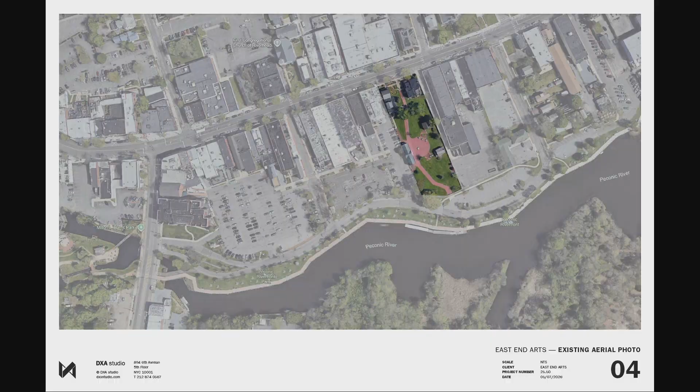The first slide is simply showing the existing conditions and the current campus of East End Arts in the context of the town of Riverhead.

Most of these buildings have been relocated at one time or another. The Corwin House and the Benjamin House are original structures that are important from a preservation point of view to maintain frontage along Main Street, and that's going to be incorporated into the plan that we show you.

This next page is simply a site plan showing the existing condition as it is. What's important to note here are the elevations, the heights of the topography. At the rear of the site, the south end, we're down around 5.0 in elevation. Up at Main Street, we go between 13 and 12.6 on the edges of the site. The goal is to get the site up to 13 or 13.5 in order to reach the proper elevation to avoid any flood issue.

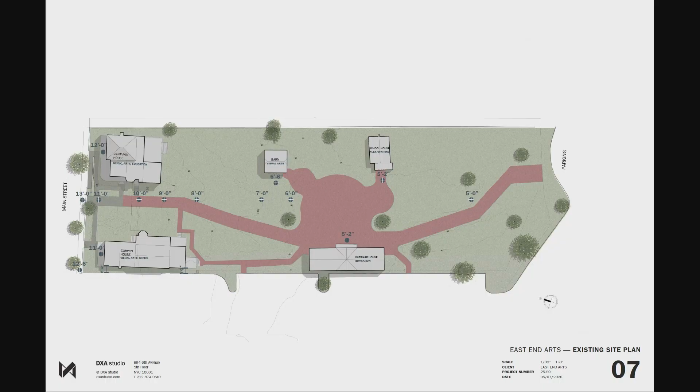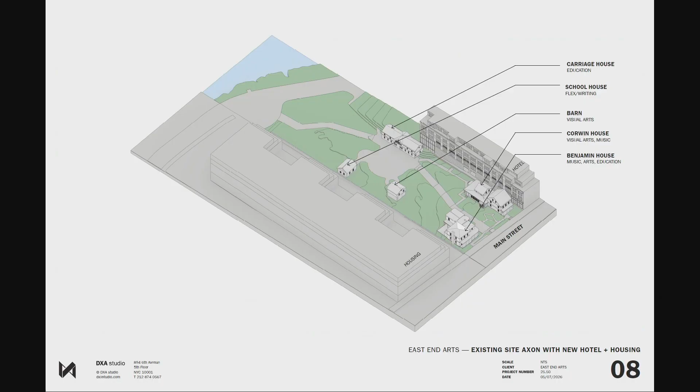This next page, on page 8, is showing the existing campus in the context of the new buildings that are under construction or underway, in terms of the hotel to the west and also the new housing project to the east. We wanted to show this in reference to the scale of the campus versus those projects and thinking about how the interaction of those buildings works with our project.

This is a perspective view from Main Street showing what it will be like when those buildings are completed, without doing any moving yet. In terms of planning, we wanted to really think about how we mitigate between those existing structures and the new structures and create a buffer and also an identity for East End Arts.

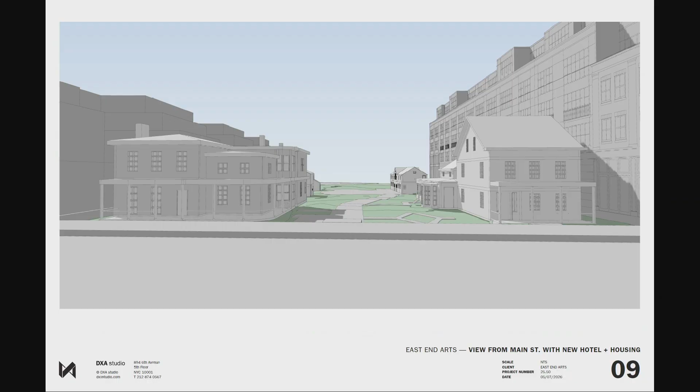The next page is now getting into the strategy of how we want to deal with the elevation changes on the site. Our thought was that instead of bringing up the majority of the site, or the whole site, to that goal of 13.5 in elevation, we would try to locate the raising of the topography up on the northern end of the site towards Main Street.

And that gives us an opportunity for two things. One is to create a campus for East End Arts on the northern side of the site. Then on the southern end of the site, it leaves it open as an opportunity for an outdoor theater project, which has been proposed previously, and gives a lot of flexibility in terms of how that could be realized. By doing this, the goal really is to mitigate the amount of soil that we need to bring onto site to achieve that topography.

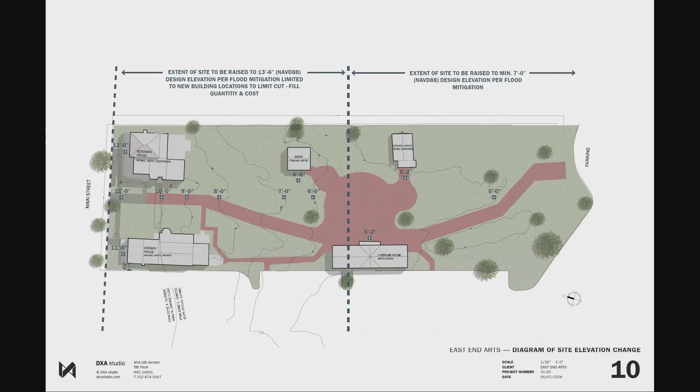In the next image, we're going to go through a series of slides that shows how the buildings will be moved. On the bottom left, what we're showing in shadow here is the Corwin House moving up. That's in part to accommodate an access road that is next to the hotel.

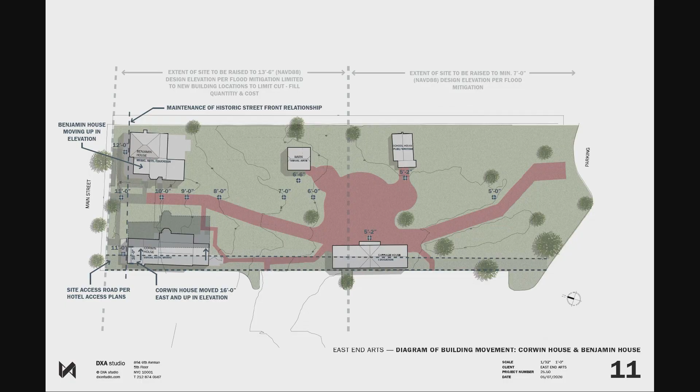But we also need to maintain the street frontage of the Corwin House along Main Street for historic preservation purposes. The Benjamin House will stay in pretty much its exact position and plan, but it'll simply move up to the 13.5 level.

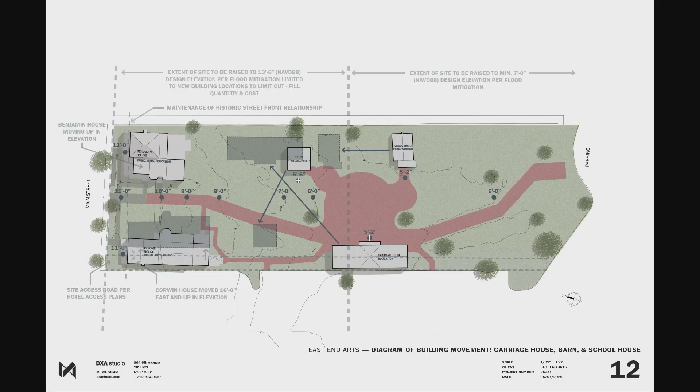What we're showing here is the carriage house, which has a specific programmatic relationship to the Benjamin House, will move up and over and kind of flip around. We're also moving the schoolhouse up in front of the dotted line, and then the barn, which we envision as being part of the visual arts programming at East End Arts, would be closer to the Corwin House so we can create that relationship. The carriage house and the barn sort of flip around and move into these new positions. All of the structures will be at this 13.5 elevation for flood purposes.

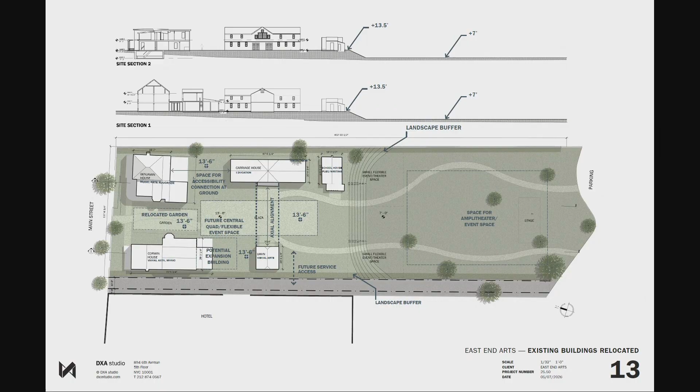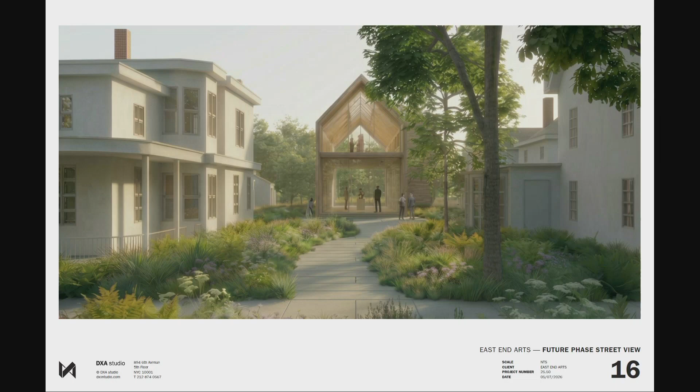So what we wanted to show you here was a bit of a teaser of how we could imagine the campus then evolving, and to show how the movement of these pieces is very important in creating some critical relationships for how East End Arts would then develop.

So this is a view from Main Street showing a new building that we imagine, which would be sort of an open pavilion. It's enclosed, but it has a very open feel that would help frame views back towards the water from Main Street. This would become a sort of iconic destination, both for East End Arts and also for the town of Riverhead, but also solving critical programmatic issues in terms of providing more exhibition space and more support space for East End Arts.

It also becomes a way of dealing with the topographic change on the site, so that you could allow the topography to spill down on both sides of that building and then go down to the open end, where you could program a kind of outdoor theater space that could be done in a very flexible configuration.

Also, what we're anticipating we'd love to be able to do is connect the Benjamin House to the carriage house by adding an elevator and an egress stair in a smaller version of that same pavilion, which would allow us accessible access to the second floor of both of those buildings, since they're both used for programming now. There's no accessibility at the moment.

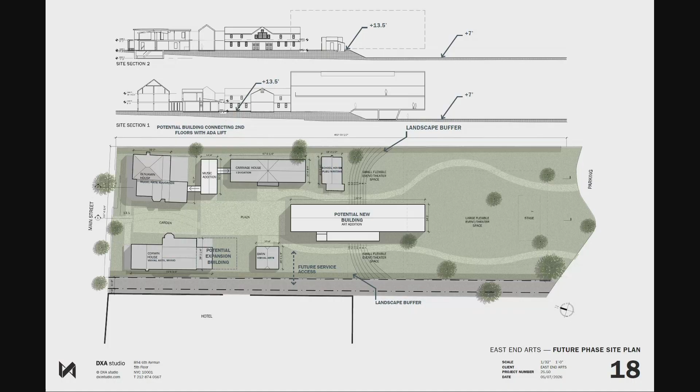At the same time, it leaves open the opportunity that we can really create this kind of destination for East End Arts and also for the town.

I'm going to tell you that I love this, and I'll tell you why. One, with the quality of the art that's going in there, these buildings match that quality. It's very difficult in the older buildings with low ceilings to really appreciate a lot of the art that's there. I love the idea of the flexible space.

The one thing I'm hoping the board will consider is, given the proximity of the building to the east, putting an amphitheater there is going to be a nightmare, because this apartment is right there on the west side, southwest of that space. There'd be a stage at some point that can program to the east as well, and then have the speakers facing west so the sound's not hitting the building.

And that would allow us to also use that stage to program to the west, to the lower town square. So it would work both ways. We've yet to have a sound engineer involved in all this, which I think is important, and Dawn and I have spoken about this—that person will be engaged because there are ways of doing this. But I've got to say I'm really impressed with the work.

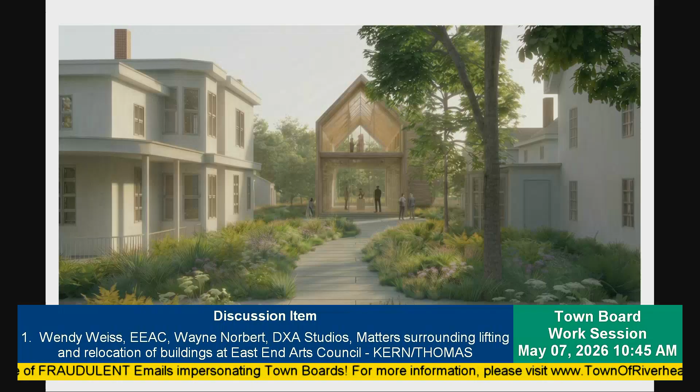You're not spending the rest of your life in the annex. It's a great building and we're very grateful to be there. It was the perfect spot to move into, and we're thriving there, and that's all anyone could ask for.

And we're most appreciative to be working so closely with Dawn and her team, and with you and with DXA, to be part of the process of all of this and be part of this exciting time of revitalization. I've got a long history here.

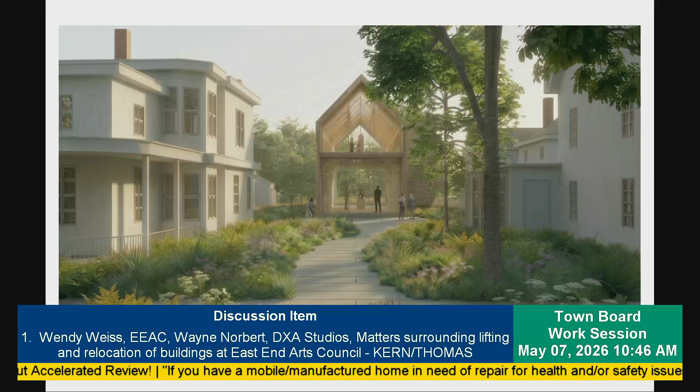I went to Mercy High School. I know what this place has been, and I also see what it can be, and I think it should be that. So maybe it was the stars aligning that I'm the right person in the right seat at the right time, but it couldn't be without the collaboration, and that truly has always been.

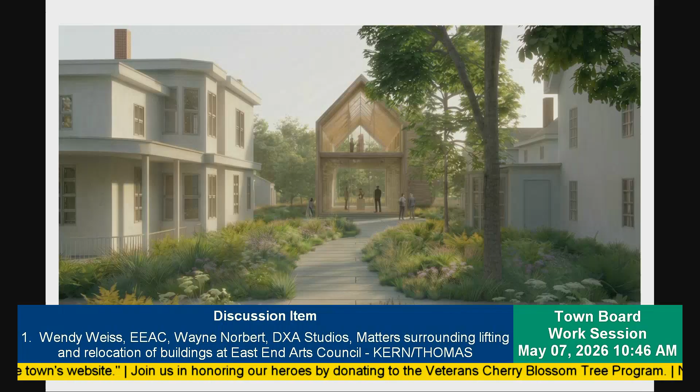And it's about the preservation of the historical buildings, the preservation of arts and culture here in downtown. Since I got here, I've been calling it the Arts District of the East End, because I believe it can be that, and this is all moving closer to that direction. And we're rowing in the same direction, which I think is pretty incredible.

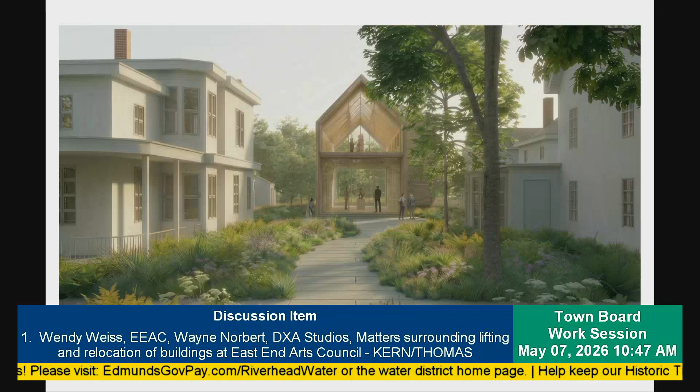I think it's phenomenal. Culture and the arts are alive in Riverhead, between the Suffolk Theater, between East End Arts, between the Jazz Loft taking over the Vail Leavitt, and the amphitheater that's coming. And obviously your campus, it's a thriving area for the arts. It's going to draw a tremendous amount of tourism to this town.

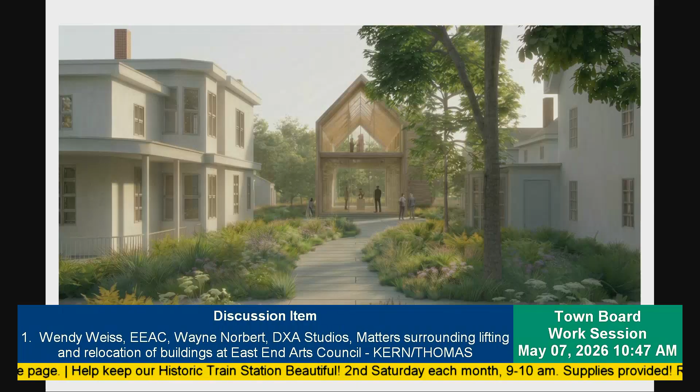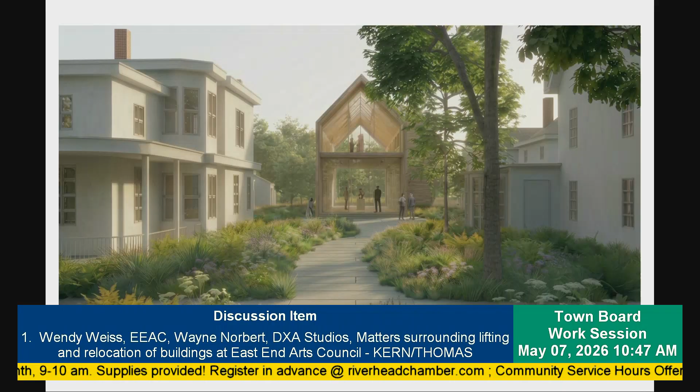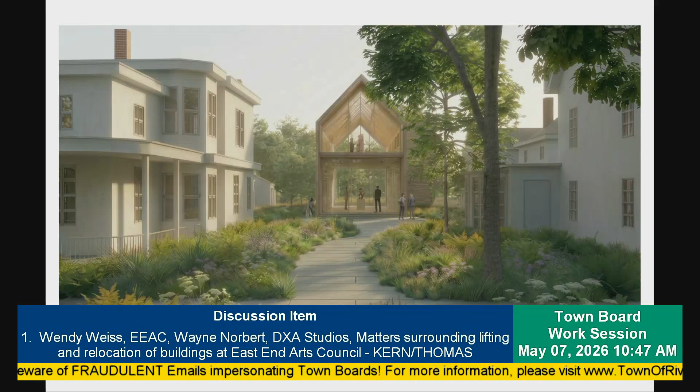We're working really hard in the meantime so that we're not just waiting for this to happen. Construction begins tomorrow on the build out at our temporary gallery space at 48 West Main. Thank you to Councilman Kern, Councilman Rothwell, and mostly to Dawn and her team, because that was a lot to do. We'll be opening that up with our Detour exhibition, our signature summer exhibition, on June 13th. And it's right across the street from the 11 West Gallery at Peconic Crossing that we've been operating. So we want to keep things going.

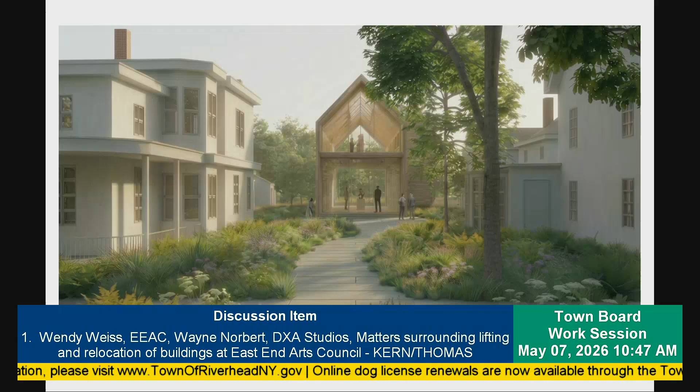We're not just sitting idly. We want to keep it moving and shaking. And that's why I'm on the Business Improvement District Board as well, because it all has to breathe together. Just want the public to know that you haven't moved, you're under construction.

That's right, until we meet again. We have the Mosaic Art Festival coming, on May 31st, which will be here on the Town Hall campus, which will be another great change for a little while until we get back into this new Main Street and Town Square area. You know, these things are all good things.

And maybe that's a good thing, I like change. I think change is good. I think it's necessary, and it's exciting to be a part of it all.

Sounds like a song. Pull out the guitar, Bob. Are you going to play at the gallery opening? We have a show all about music, Bob. It's all about music.

He's better than he himself thinks. I've heard him play when people recorded with us.

Look, there's no question this is a game changer. This is a great start to downtown, because this is the best thing I've seen so far coming into downtown, by far. Once we see that hotel built, people are going to stay in the hotel, the artists are going to stay there, because you are attracting something. I have a little bit of experience with art and the city, and what I've seen over the last few years is like night and day.